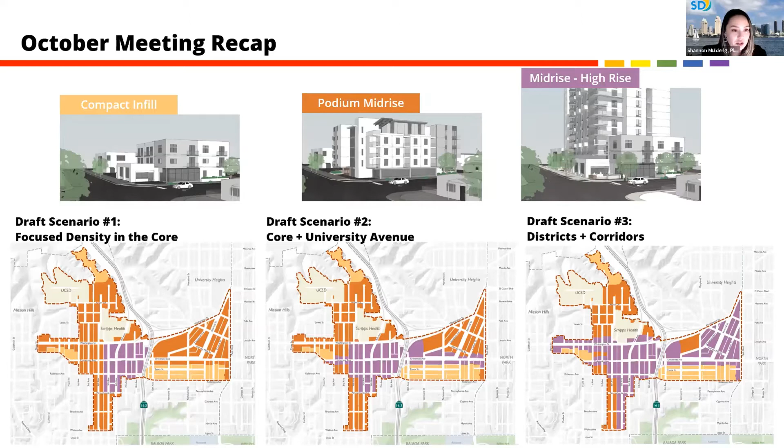And we also discussed the trade-offs that taller buildings present, which draft scenario 3 from the last slide provides the most opportunity for. Supplemental development regulations, which could be required through a community plan implementation overlay zone, which we often just refer to as CPIOZ, could allow for taller buildings that take up less of the ground floor and that present opportunities to add pocket parks, corner plazas, paseos, courtyards, wider sidewalks, and double rows of street trees.

And amending the community plan implementation overlay zone will be more of a discussion topic in the future, as we see this as a way to encourage and even require good design aspects we want to see in new development.

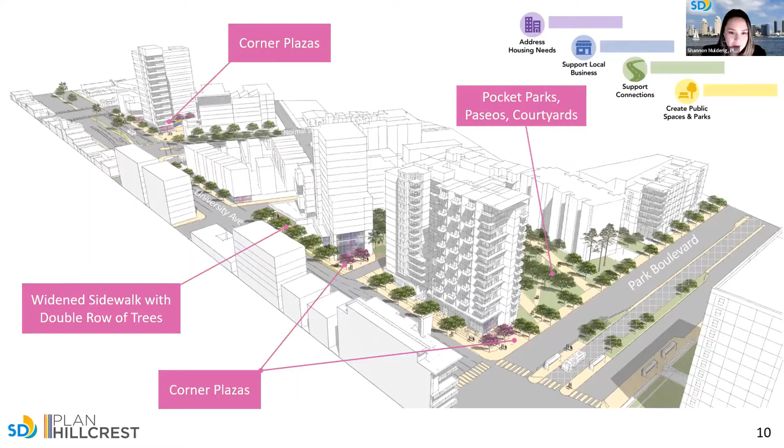We have talked about these tower controls in the past, like step backs, activation on the ground floor, building materials, and more. We also have to consider what different building types mean for reaching our housing needs, supporting local businesses, and increasing transit-oriented development to support current and future transit and to make more walkable and bikeable neighborhoods.

And here's some additional feedback we heard in October that I'd like to highlight. We heard a lot of support for increasing open space, urban greening, and wider sidewalks. A lot of support for more housing since we are in a housing crisis, and the need for affordable housing and inclusionary housing policies. There was also feedback about how towers or tall buildings don't need to harm a neighborhood when good design is encouraged or even required.

This ties back to the community plan implementation overlay zone and supplemental development regulations that we could include as part of this planning effort. Moving on to mobility, we heard support for prioritizing housing on transit corridors, specifically Park Boulevard near the bus rapid transit station and along University Avenue, and support for a live, work, and play neighborhood. And as for climate, there was support for making land use decisions that help implement our climate action goals.

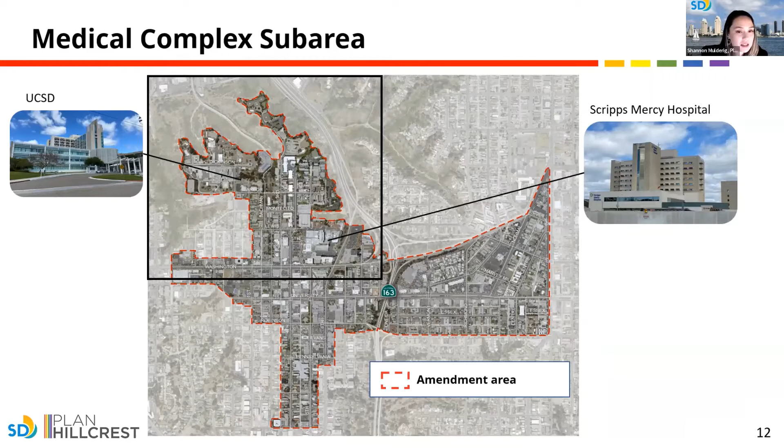A feature I want to point out about the sub-area is the presence of the two large medical campuses, the UCSD Medical Complex and Scripps Mercy Hospital, which both have proposed upgrades in the works. The UCSD Hillcrest campus is in the process of implementing their long-range development plan to create a modern mixed-use health campus, proposing multifamily housing on site and improving mobility access connecting to Hillcrest. And the Scripps Mercy San Diego master plan proposes to build up to a 12-story new hospital and renovated offices on their campus. So I'll now pass it over to Claudia, who will be discussing mobility options for Washington Street.

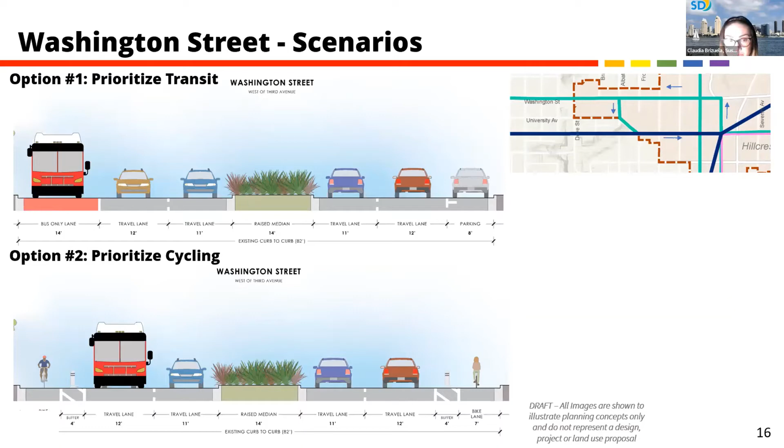Thank you, Shannon. Thank you, Claudia. So we're going to move into a discussion on the draft land use scenarios that go hand in hand with the mobility options for Washington Street that Claudia just covered. But I just want to remind you all, we will take a break after this land use discussion so we can take any of your questions and hear from you all, because I know this is a lot of information, but hang in there with us.

So we thought it would be helpful to preface our conversation on land use scenarios by illustrating what the colors on the maps mean and what kind of development we're thinking about. There's a lot of overlap with the typologies we presented in October, but the colors have changed a bit and the typologies have been refined as well to suit the medical complex sub-area.

Diego, would you like to walk us through the 3 typologies? Sure. As Shannon mentioned, it is helpful to think about how development typically, particularly housing and mixed use, follows certain typologies that are based on what we're seeing in the construction industry.

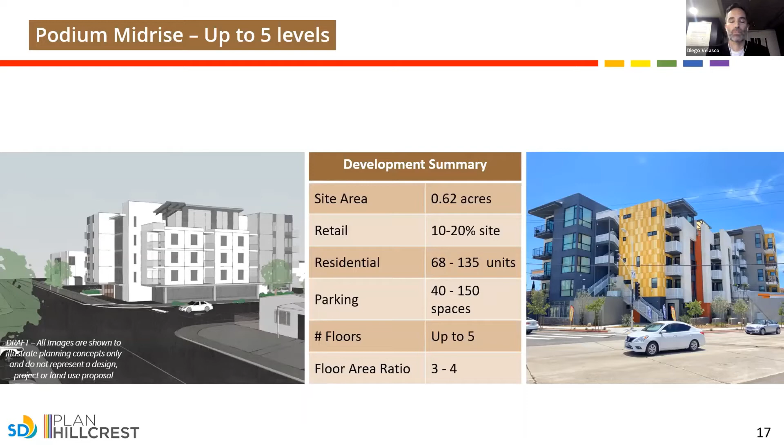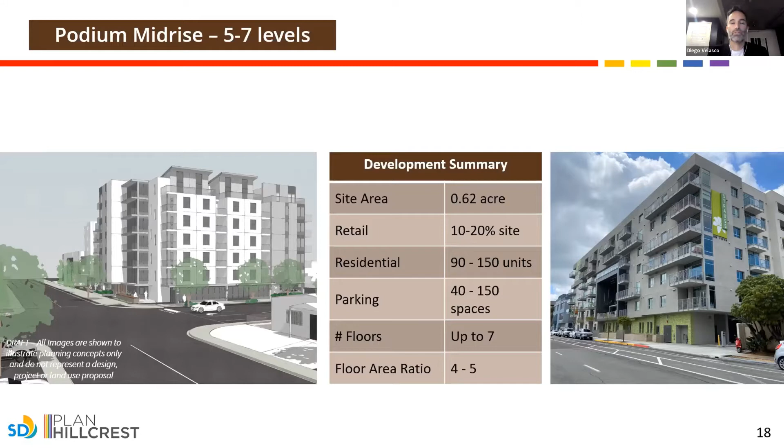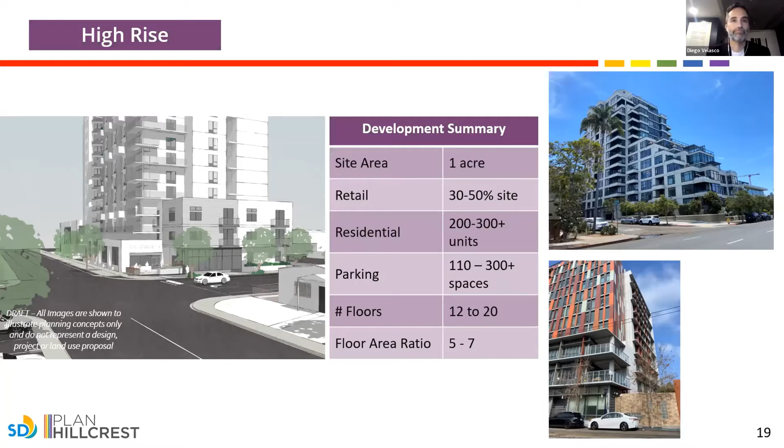So now we can link these typologies to the colors on the map to evaluate 3 different land use scenarios. Keep in mind as I go through these that the end result could be a 4th option that is a hybrid of these scenarios or a new option altogether. But we felt these 3 were a good starting point for discussion for this medical complex subarea.

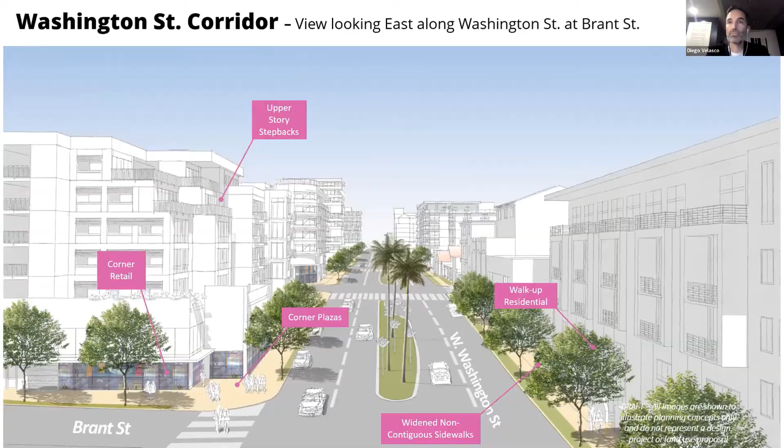So this is just a conceptual sketch, not a development proposal. It's just to give you a sense of what that scenario could look like.

And so here's our second draft scenario, which focuses more intensity up north along the 4th Avenue transit corridor. The rapid bus line is proposed to go up 4th Avenue, connecting to Mission Valley. And since the medical campuses are proposing to redevelop this area, we're already starting to see a transition to more mixed use and higher density residential, reinforcing 4th Avenue as a transit corridor through this dark brown, which again represents the Podium Mid-Rise up to 7 levels, which can help link the two campuses.

Also, bringing more housing near the jobs that the medical campuses provide can help us achieve a better housing-to-jobs balance, which, as previously mentioned, is currently very imbalanced. I'll also mention that although a bus stop is not currently proposed on 4th Avenue, adding more potential riders along this corridor could be a justification to add a bus stop there.

And this option, like the last, also includes high-rise buildings shown in purple near the core east of 4th Avenue.

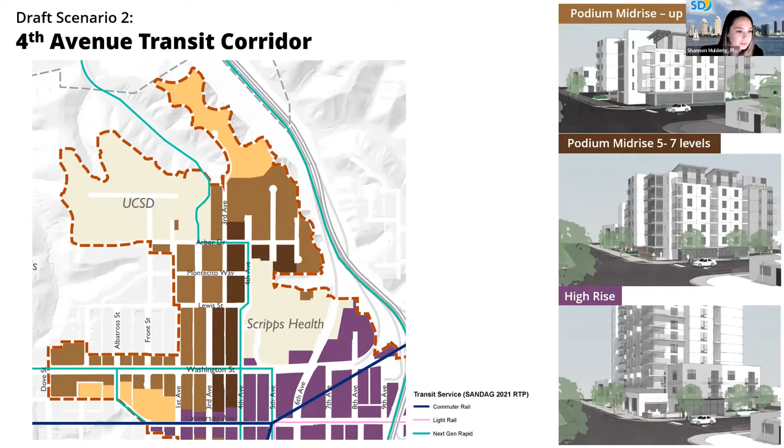So what could that look like? We're looking now on 4th Avenue South along where Arbor Drive is. I'll point out there is a project under construction—some of you may be familiar—right at the corner of Arbor and 4th, where Shannon is highlighting.

So really beginning to build upon this notion of a transit corridor with mixed use housing. Again, looking at opportunities to widen those non-contiguous sidewalks, or create opportunities for non-contiguous sidewalks. Also looking at corners and the potential to accentuate them, maybe with a little bit of neighborhood-serving corner retail, as well as walk-up residential.

This area turns into a very residential area, so supporting that, as well as the corner retail as I mentioned. So this is a view—you can see in the background the Scripps campus and the Village at Hillcrest, some of those towers, and then the potential for more towers there associated with the core, as Shannon had mentioned.

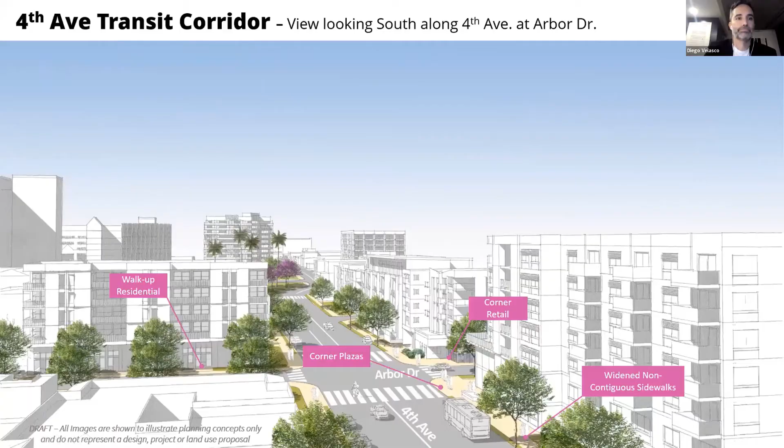And so moving into our last draft scenario, this one is sort of an in-between of the first two options and focuses intensity near the core, reinforcing this idea of a gateway and the sense of arrival when entering into Hillcrest from the 163.

So the dark brown, once again representing up to 7 levels, is proposed between 1st and 4th up to Lewis. We stopped it at Lewis because the parcels here are a bit larger and could accommodate more height. This option focuses more intensity near the core, where there are more commercial businesses concentrated.

And we already see, once again, taller buildings with Scripps Mercy Hospital and Village Hillcrest. So this option proposes the lighter brown down Washington Street east of 1st, and like the other two options, proposes the high-rise in purple near the core and the Scripps Mercy campus east of 4th.

I think the one thing we wanted to point out, or for discussion, is along Washington Street, some of the differences on the side that is west of 1st Avenue versus the side that is east of 1st Avenue. As you start to head east towards Scripps Health, you really get a different sense of the street there—it might be more associated with the core.

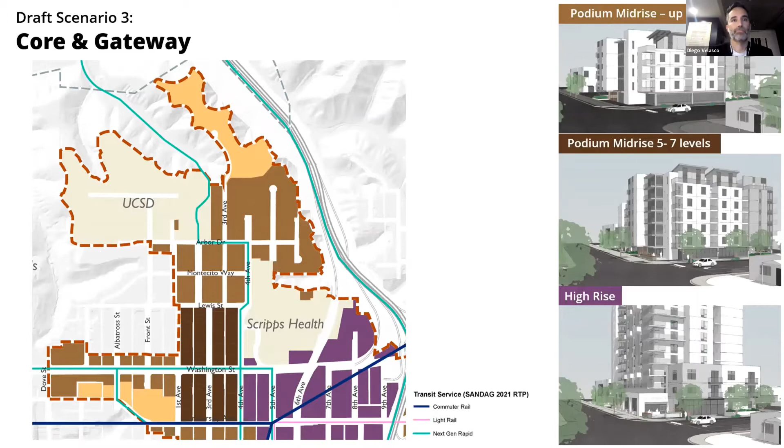So what could that look like? This is a view looking west along Washington Street, right about where 8th Avenue is, where that off-ramp from the 163 is. This is a real gateway area.

So how do we build upon that and strengthen this sense of gateway through the core? There are already some gateway buildings that are prominent, the ones associated with the Scripps campus, the village at Hillcrest, and the Scripps high-rise building there. So really thinking about taller buildings as gateway-defining for the area, and looking at options to support roofline variation, corner retail again, and just building a sense of arrival at the core of the planned area.

And we see that we get that sense of arrival with the Crest Urban Apartments here on the corner on 8th Avenue today, and we could further build on this gateway feeling.

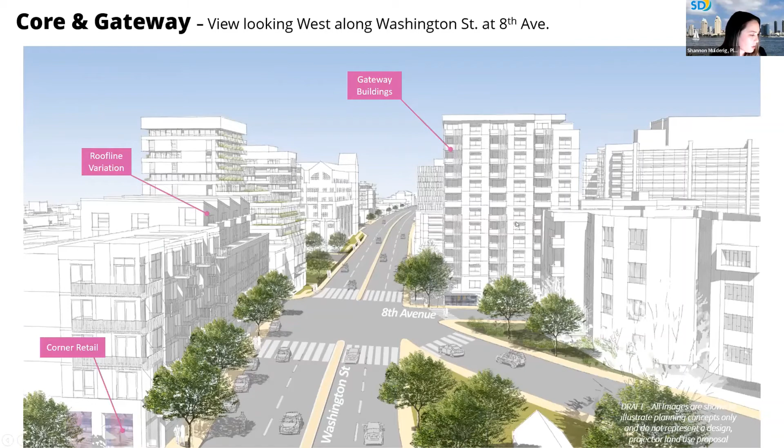So there are our 3 draft scenarios, and we can take a break now. We would be happy to answer any questions and would love to hear from you all on what you think about both the mobility options for Washington Street that Claudia covered, and how you feel about the pros and cons of the 3 different draft scenarios. We'd also like to hear what trade-offs we should consider, or possibly ideas for supplemental development regulations we could consider as well. So Roy, I'll let you handle it.

As our normal procedure is, we will let non-board members speak first. The reason we do that is because board members are supposed to represent the whole community, so you're supposed to be listening to what these non-board members say and reflect that in your views as well.

Before we do that, I just want to get clarification. Previously, you had the light rail going down 6th Street. In this diagram, you have it going down 5th Street. Did you want to say what it is?

This is Claudia Brizuela. The diagram we're showing is what is currently adopted in the regional transportation plan. We've been in communication with SANDAG and they've identified it - they have it essentially as a line on a map on 5th Avenue. We've been in discussions with them and find that 6th Avenue is more appropriate since there's more space due to the recent construction of the protected bicycle facilities. That's something they said could possibly be handled in the next iteration of the regional transportation plan. These regional transportation plans get updated every 4 years.

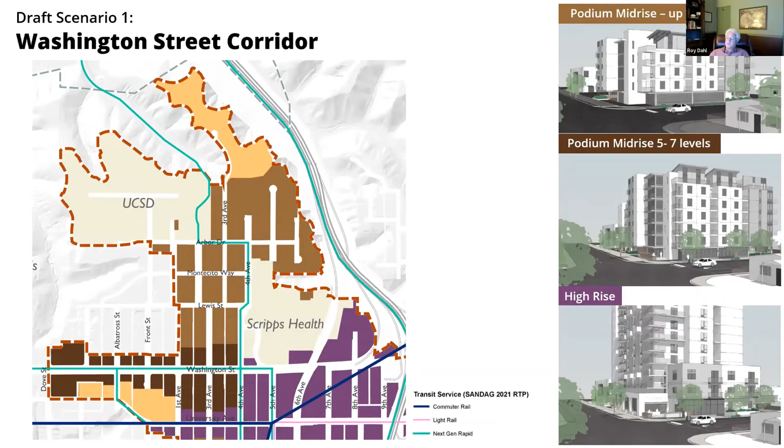I just wanted to add, somebody had a question about Pernicano's and what's going on there. You can visit their construction office. It's on 6th, sort of on 6th and Robinson, and you can go in and see the mock-up of what is going to be built there. So I just wanted to pass that on.

One of the things I have to say is that I really like where the housing is going. I think this is a great option for aging baby boomers, especially if you put in an elevator, especially with the proximity to 2 hospitals here. So people who are aging out of maybe their single family home, or want to have a closer proximity to these hospitals, I think this is a great option for them. So I would also echo having buildings with elevators.

Somebody mentioned something about parks and open space, and I think there's not enough rooftop open space in San Diego. They do it very well in Chicago, which has very bad weather. So keep that in mind. You could put a lot of open space on rooftops. And I really like that option.

And then I also think the other thing you're talking about is the retail option underneath the building. When I was in Chicago, I lived in a high rise. We had a grocery store underneath, and it was so convenient. So I think that's a really important option to also have.

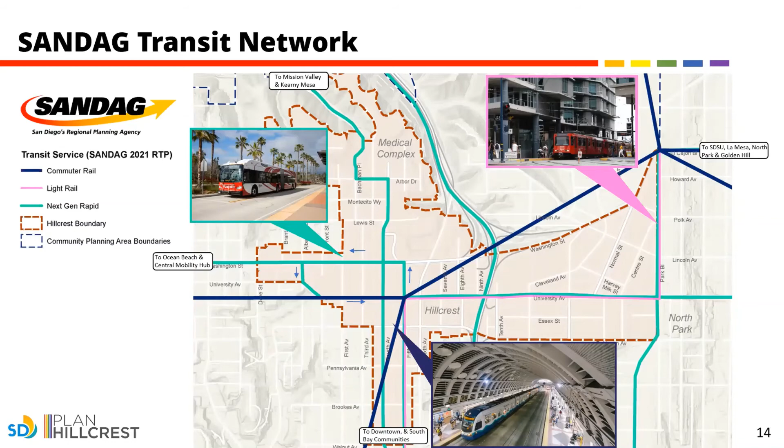The second item, I'd like to say that the idea of meeting the housing needs through things like corner plazas is completely unrealistic. I would like the staff to comment on the stated goal in the grant of adding 10 to 15,000 housing units. So for those people viewing who aren't aware, the staff got a grant from the state of California to fund the staff work and the consultants that we're seeing tonight. One of the goals was to add 10 to 15,000 housing units. So I clearly would like some conversation about whether that may be excessive. That would be more people than live in the entire city of Coronado.

The second part of that, my question for staff is to please comment on the idea of by-right development. That same grant that this project is under says that the new housing's supposed to be done by right. Now, what that means is without public hearings, without any kind of hearing like we're having today, it's approved by a staff member downtown. So while we're talking about little details, I do want the staff to comment on the 10 to 15,000 housing units and the idea of by-right approval where there are no public hearings. Thank you.

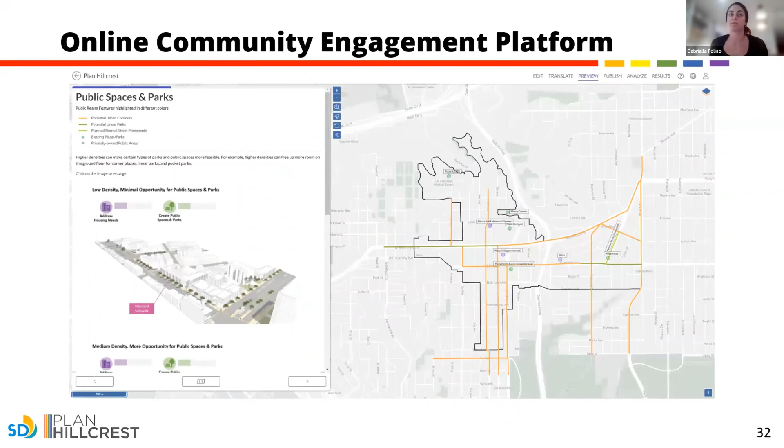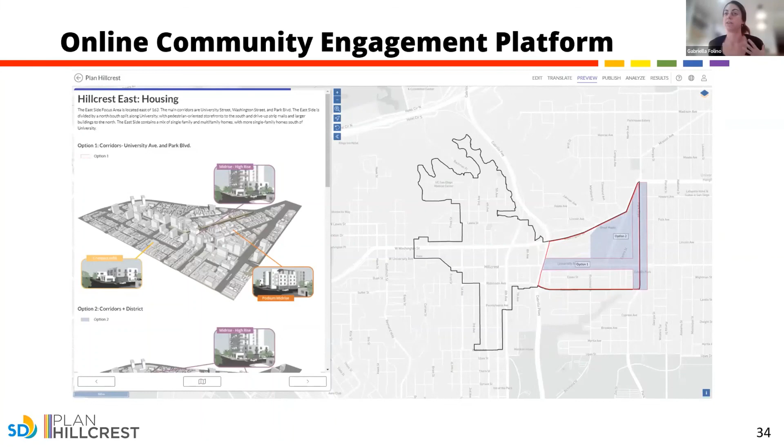Next slide. We'll focus in on the three sub areas and give an overview for anyone who hasn't been fully involved in the process. That'll be a brief overview, and then we'll zoom into each sub area, similar to what we've been doing at each meeting, and discuss housing possibilities, retail, ground floor, supplemental standards, etc. We'll also get into mobility options for each sub area. We don't have much time left, but if anyone has general feedback on the online engagement tool, that would be great.

All right, we'll start with the community non-board members. Sanjay?

Yeah, I think it's great that we're doing this, I think it's important. I know SANDAG's regional plan had a map that allowed you to pinpoint areas, especially for walking and pedestrian issues, because there's a lot of problem areas like First Avenue, University, and Washington. I think that would help provide feedback from the community on what areas we can focus on to improve mobility, to Roy's point of making sure we have that, and to Brer's point of building complete streets. That's all I have. Thank you.

Any other members of the public would like to say anything on this? Not seeing anyone, we'll go to the board. Matt, you wanted to say something?